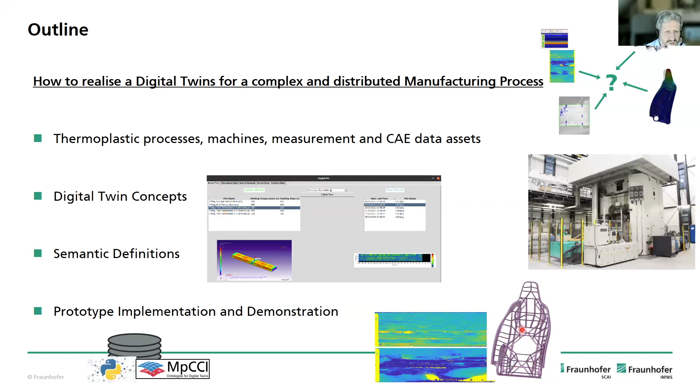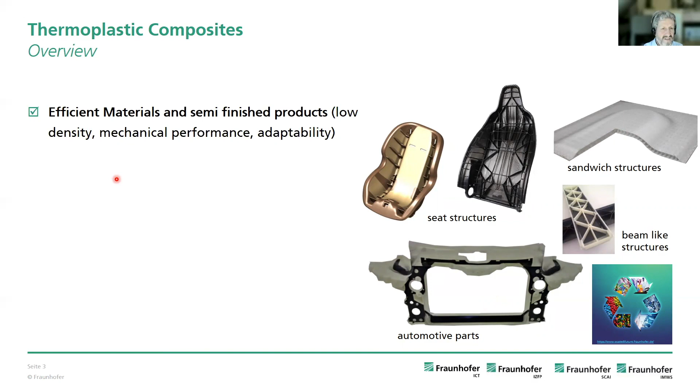So first, let's start with the thermoplastic composites. What are they used for? Application domains are mostly in the automotive area, for example, seat shells, but also chassis parts or shorter parts, beam-like structures. So anything that you can make out of these kind of sandwich structures. It's a quite efficient material, has a low density, but a high mechanical performance, and is highly adaptable to many different geometries and configurations.

We already have quite efficient manufacturing processes with short cycles and a high level of automation for serial production. And when you look at the seat shell here, we can produce quite complex part geometries by combining different types of manufacturing subsystems in one part. So, for example, doing a hybrid forming and injection process merged in a combined process. Also, the part manufacturing has a high level of integration, high functionalization in it, and also sustainability and recyclability is quite good in that domain. So that is just a short background on the thermoplastic composites.

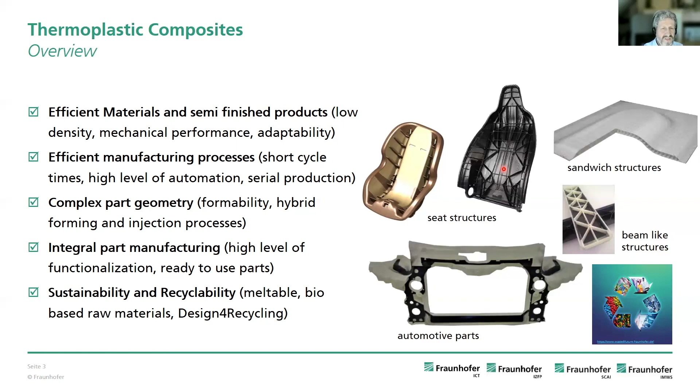What is the manufacturing workflow? If we, for example, let's go back, if you look at what we need to do if we want to produce such a seat shell for the automotive environment, what does the manufacturing workflow look like?

Starting point will be the fibers and the compounds coming from raw material providers. These compounds and fibers then will be used as input for the unidirectional tape line machine from Krauss-Maffei, for example, UD500. And the output will be, you can see it here, an endless fiber tape, which has a maximum width of 500 millimeters, might have a length of a few hundred meters, so that the final roll might have a diameter of 2 to 3 meters and a width of 50 centimeters. So it's quite a heavy thing.

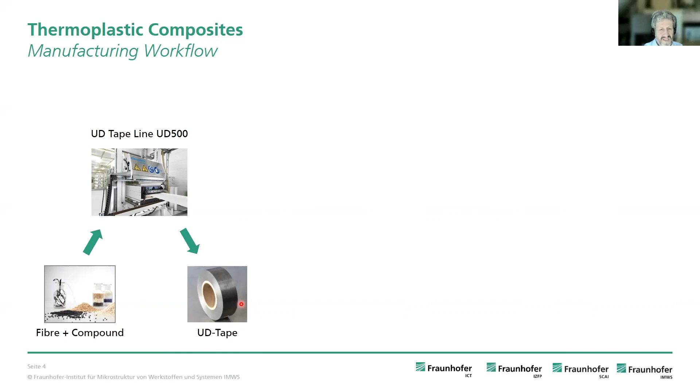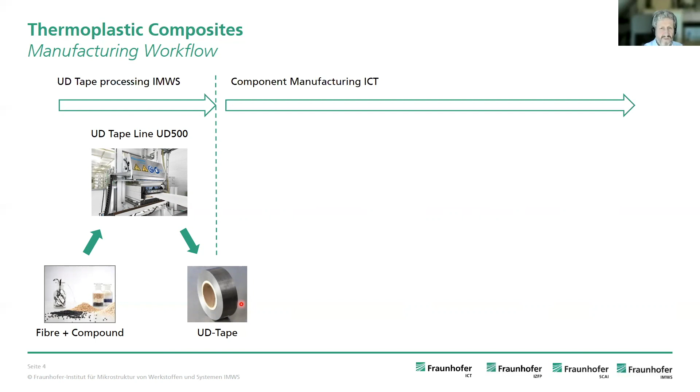This currently is done on this site in Halle, eastern part of Germany, at IMWS. They have those machines and all the knowledge to do it. And then these rolls will be sent to the ICT in Karlsruhe. They do the tape laying on these Dieffenbacher machines. The result of that stacking process will be a stacked layup, which you can see here, for example. This then will be consolidated in another machine, so that you then have the laminate.

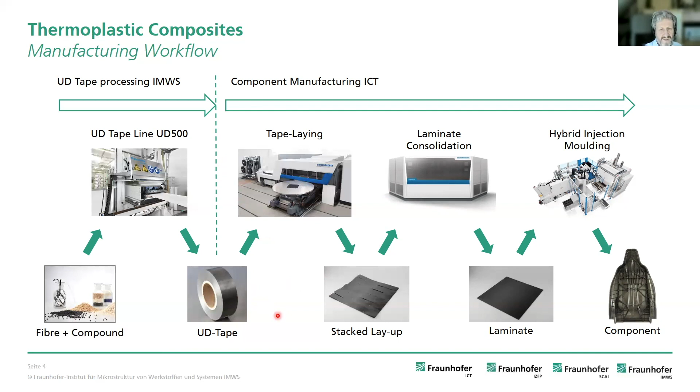The laminate then can be formed and hybrid injection molded to come into its final form of a seat shell, also having maybe metal parts included in that part. So those are the major parts of the manufacturing history. We have some steps left out here, for example, the slicing of those tapes, cutting maybe a few centimeters in the beginning and at the end. So some minor preparation parts would even happen here. They are not part of this digital twin, but we have to be aware of these manual parts outside the automation process.

What are the details which you want to look into? If you look into a tape and you make a cross section, this upper part would be a more or less ideal impregnated fiber with ideal fiber spreading, low gaps, low pores. It's very fine, can be used in high quality. If you look at the lower side, this would be a worse quality of tape. It might be used in some areas where we don't have critical loads on a part, but you need to know it, and this kind of information has to be extracted and measured by the sensor systems which we have implemented in the production machines for online inspection, but also for offline inspection.

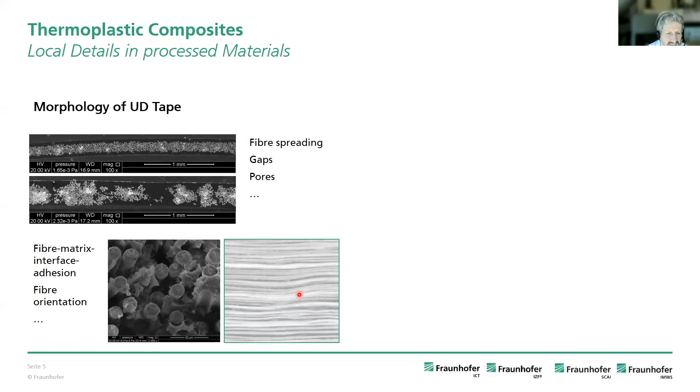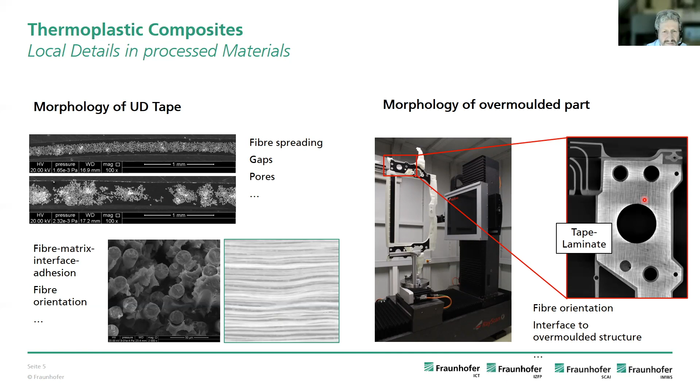So that is the level of detail that we have to look into, because those details have an influence on the final product quality. That means during the production steps, which I showed in the first slide, we have to implement and integrate many different types of measurement technologies, sensor technology, to get as much detailed data as possible out of the production process, and finally also for the final product testing.

That would mean, for example, on the tape production machine we have a camera system. It's kind of a stereo camera system, a profilometer to measure the thickness, but we also have infrared cameras on top and below the tape to do a thermal inspection, which also gives some first quality ideas of the produced tape. If that would be the produced part, that's not yet the final tape, so you see here the big gaps. In the final version you don't find these gaps, but they would have this camera here and the other camera here. They would provide these kinds of images during the ongoing production of the tape.

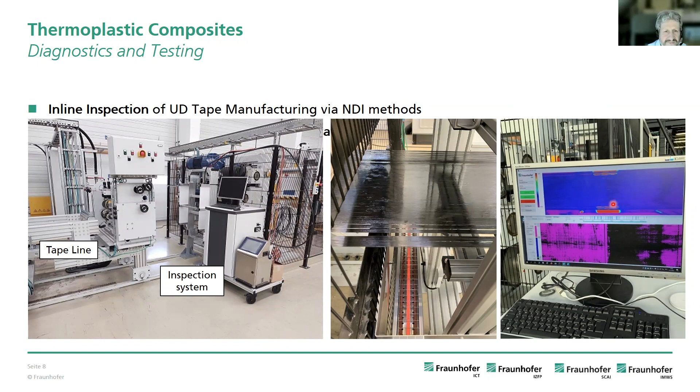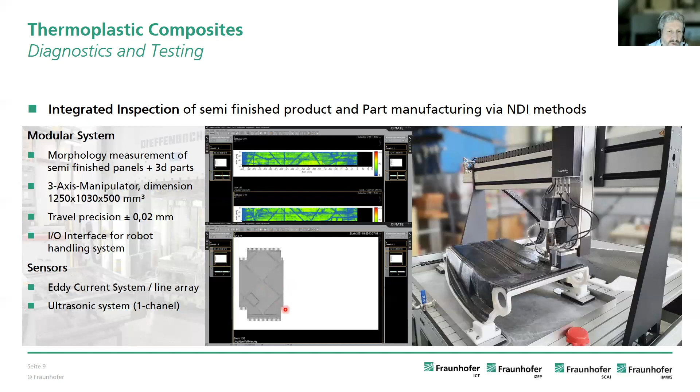If you look at the other end, on the seat shell, you might have morphology measurement systems, manipulators which can go slice-wise over the seat shell and give you feedback of the stack information of the final seat shell, which then can be compared to the stacking information used before the forming of that seat shell, that means in the laminate. That can be combined and compared to get a better feeling of how the input laminate will be formed into the final seat shell itself. You can see the real parts here, the real installations at ICT in Karlsruhe.

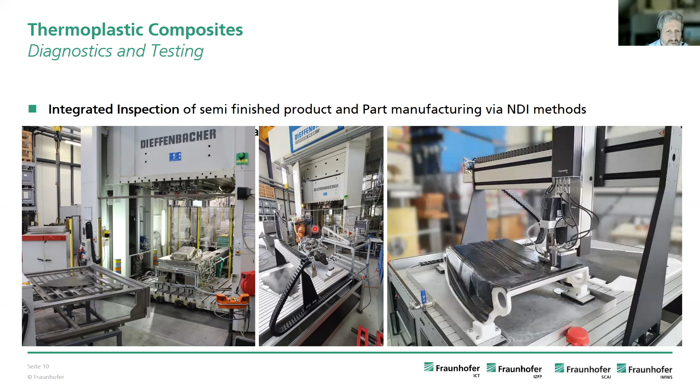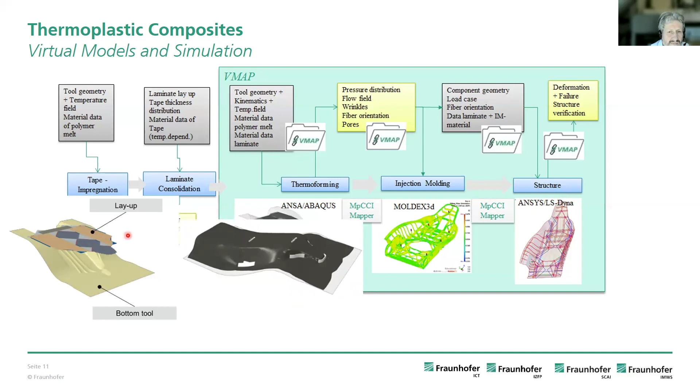And of course, we also do simulation, virtual simulations of the tape impregnation and laminate consolidation, thermoforming, injection molding, and structural processes. That means we have quite simple kinematic tools to do the simulation of the layup. We have more complex tools to do the injection molding part, hybrid mold, injection molding for the seat shell.

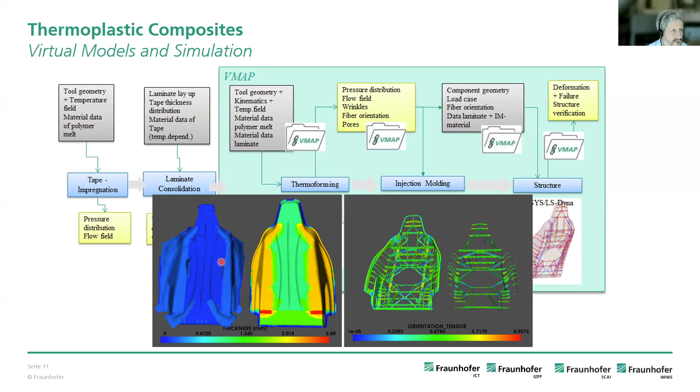And also we have tools to map data from one manufacturing process to the other one to make use of the preloads and the history of the materials in the follow-up simulation steps. So we already have a number of simulation steps implemented, but not all steps are simulated in that detail.

And that's also an ongoing work that is using AI technologies to do a smart analytics of the data. For example, if you have enough data of the tape production, and if you have quality labels on the tape, so that an experienced engineer says this part and this kind of fiber orientation is fine, and that part is not fine, is worse, then we can use AI and image processing tools to do more automated defect detection during

the online production of the systems, but also for the laying processes to get a better feeling if this kind of laying is favorable for the final product design, so that we, at the end, and that is partially still a future topic, get a parameterized simulation so that we can automate the simulation and the modeling by getting support from the AI-based analytics, which is based partially also on real data coming from measurements and sensor data.

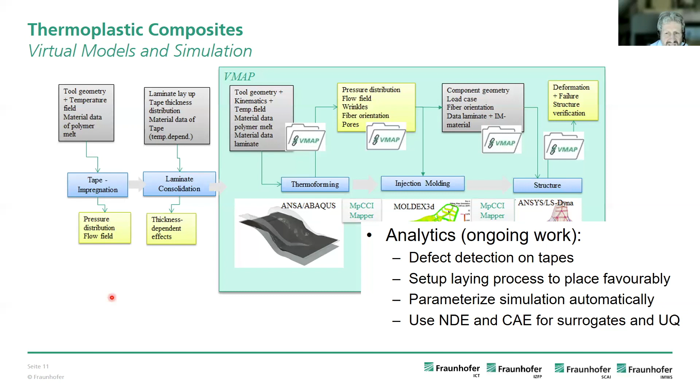So I showed you so far that we have many different sources for data, very different data also. So we have virtual simulations, mostly using FEM simulation models. We have diagnostic and online tools, online testing. We already had partially defect detection tools using AI tools. And we have access to many of the manufacturing parameters and manufacturing data itself and the organization of the manufacturing

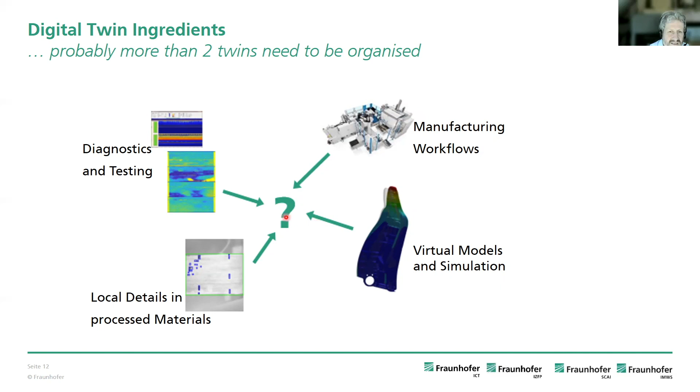workflow. And all these data sources need to be combined in a digital twin, or it might be a digital quadruple even, because we have more than two sources of data and information which we have to combine in a good way. That means we have to combine data from manufacturing, material, and simulation.

What does it mean and why do we use it in our application? So at the end, we do not only want to organize data. Of course, that is one benefit of its own, but we want to use this better organization of information and data of the complete processes and parts and products to optimize the processes and optimize the products, because we know better what is happening during the single steps. So that we can enhance the details, but also the overall development process.

And we want to get a multi-resolution and cross-scale, cross-stage information, not only on the highest level, but also, if possible, integrate microstructure information wherever possible and integrate that into the macro information world. And also try to get a better feeling of the interferences between the initial input of fibers and matrix. What kind of influence does this have on the final product of the seat shell?

And to organize all these data and information in a good way, we need an ontology-based data integration. That means we need clearly defined and well understood semantic definitions of all the data, information, formats, and so on. This should be open and extendable, so that it's not defined for one single case, but it

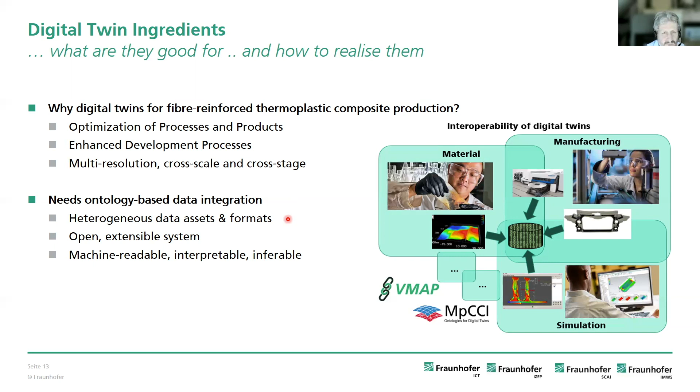And the industrial demand overall is they need to get a better understanding, and they want to get some idea how they can organize their distributed data systems, which they probably have, the legacy systems, data systems. How can this be done? And by using, as far as possible, standard interfaces, standard rules, standard concepts, which are currently used in industry.

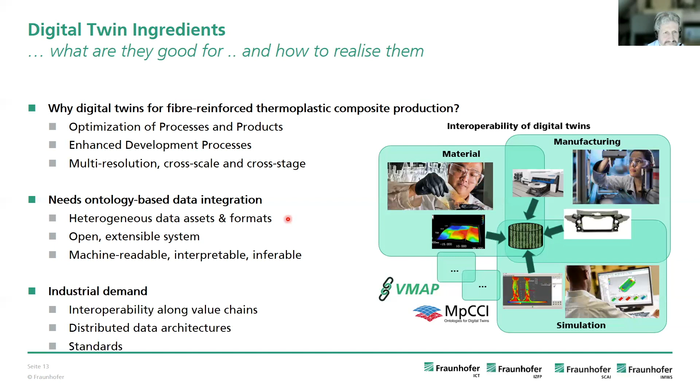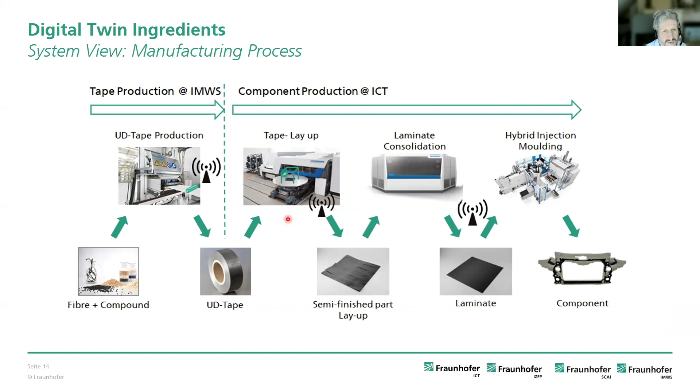So if you go back to the general manufacturing workflow, which I mentioned in one of the first slides, if you want to get a systematic view of the manufacturing process, we have to split the parts up into all their details which are of some interest for us. That means, as you can see in this animated part, finally we will have a list of details represented by those icons here, which represent the most important parts in that manufacturing process.

Starting from the input here from the fibers and matrix. In the beginning, we have here the tape production part. We have here the stack laying part. We have here the overmolding part, and here we have the final seat shell.

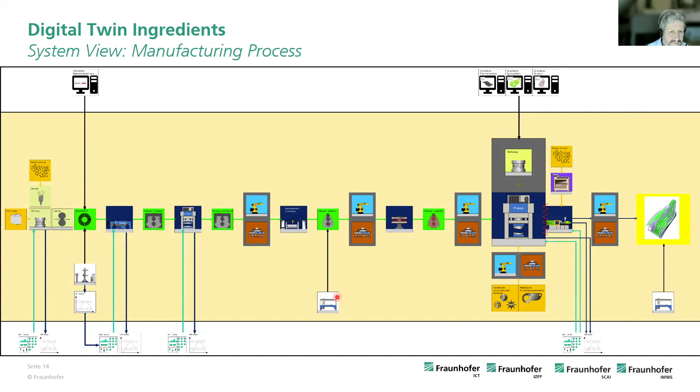That means we have machine data. We extract machine data, all the parameters which are of some importance or might be of some importance for the data inspection from the different machines: for the tape machines, for the stack laying machines, for the compounding machines, and for the hybrid injection molding machines at the end. So we collect all these data, list of parameters over time.

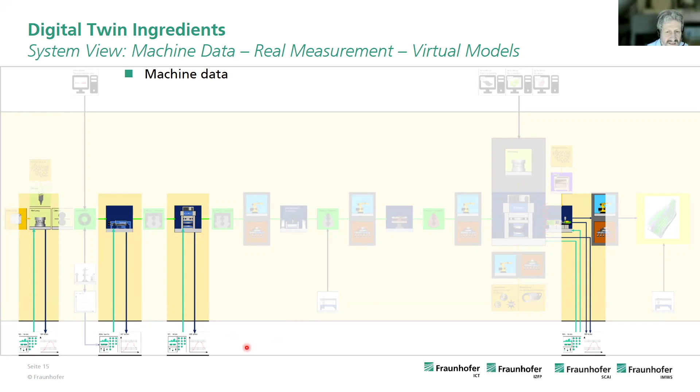We collect also data from the non-destructive and online evaluation in the machines. So we have three places at the moment where we can do an online inspection. We have online monitoring sensors installed in the tape production, in the overmolding part, and in the final product inspection part. These data might bring us results from ultrasound inspection, thermography, and other inspection tools.

We have a number of simulation tools. Here in our case, currently only for the two major steps, for the tape production and for the hybrid injection molding process, where we have multiple simulation steps connected. You see here, this part is not yet simulated because we don't expect yet too many unexpected issues, problems, and so on in that domain. We could do this later on and extend the simulation world also for some of these steps in between. The concept of the digital twin is open for that, but it's just a question of efforts which have to be put into the update and creation of simulation models.

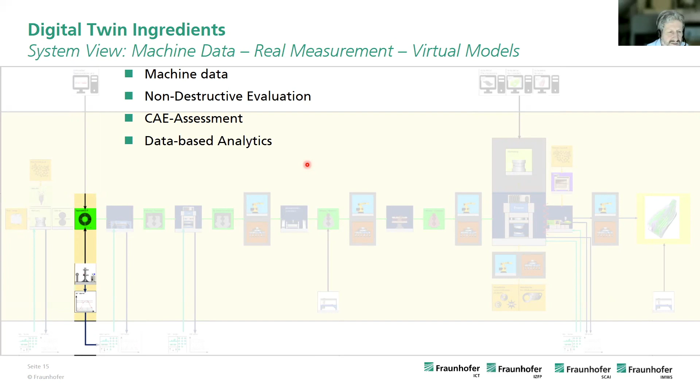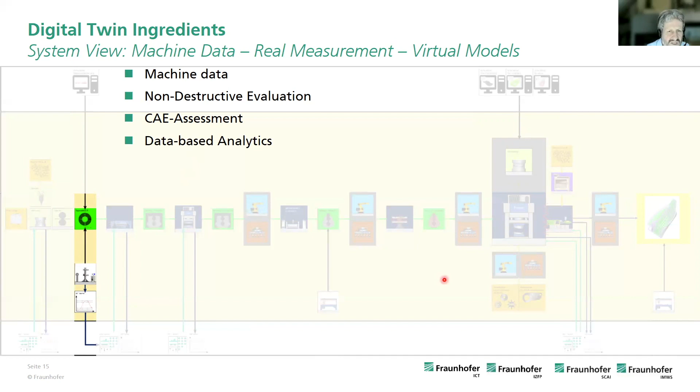And we use a first approach to use data-based analytics or AI-based analytics for the inspection, automated and AI-based defect detection of the tapes coming out of the tape production machines. But again, these types of data-based analytics could also be used in different steps here. But for the moment and for the prototype, we do it just in the first step here.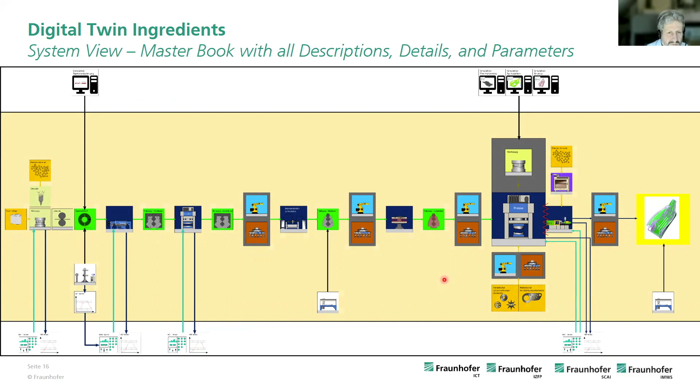So if you look at this quite complex general overview of the workflow, we also need the traditional manuals, reference books, which describe all the details of all the single steps, processes, machines, simulations. So a kind of handbook or reference book, which will be updated all the time. If you change some part here, we probably have to change and update one chapter which is describing that specific detail, and then we can regenerate a new reference book for the current installation.

So also the reference books or the master book has to be flexible, so that it's easy enough to follow the replacement of single parts in the real world, so that the master book can also be generated in a fast and efficient way just by replacing single parts in that master book.

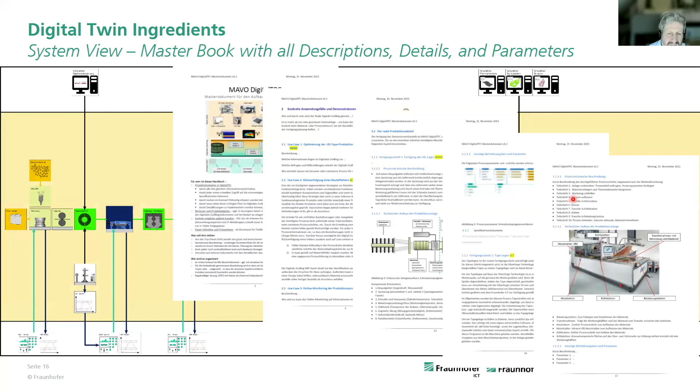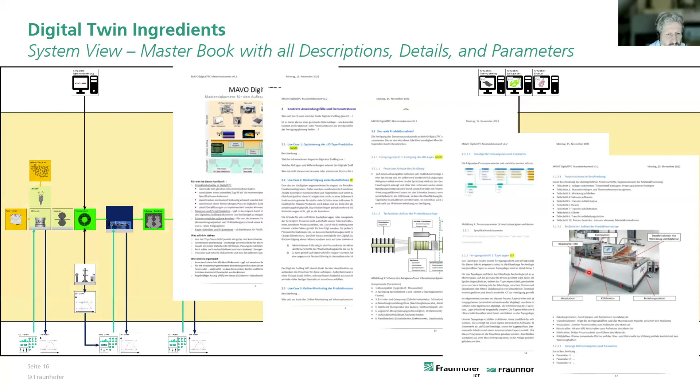So this is really a handbook for the end user and for the technical engineers to understand in all details what the parameters are about, what is the parameter range for each data, what does it mean, how is the machine built up in detail, where are the real positions of sensors in the machine, and so on and so on. So this is also still necessary in a classical way. You have to write it down and collect all information in a readable way.

So far I spoke about the ingredients, what kind of information is available and will be used and combined in a digital twin for these processes. But that is a major question, and is getting even more complex if you look that we have engineers from material science, which are experts in the fibers and matrix parts. We have experts for the different manufacturing processes. We have experts for the non-destructive testing systems. We have IT experts. We have AI experts. And all these different experts, in the beginning at least, speak a kind of different language.

Just imagine if you speak about temperature, what exactly does temperature mean? It sounds like a simple word. But before you store a temperature value somewhere, you have to know what is meant by this temperature. Is it a temperature of a complete space? Is it temperature just on a single point? Is it temperature of a room? How did I measure the temperature? Is it radiation temperature? And so on. So even for simple temperature, you have to describe in detail how this value is defined from a syntactical point of view and also from a semantic point of view.

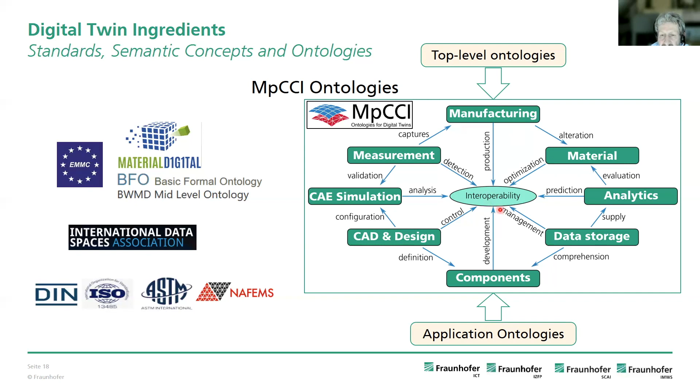And based on these many definitions, we define the basic taxonomy for materials in our MpCCI ontology, so that the major definitions, and especially the class names used here, follow these well-established and widely used naming conventions in many of these DIN norms. So that should be quite readable at that higher level. And also the subclasses are quite well described already here.

You will find similar things for manufacturing entities. What is a manufacturing entity? It might be a manufacturing process and manufacturing systems. For the manufacturing processes, you could see coatings, shapings, formings, separating processes, and so on, and detail this further. All this is already described in a very good way and accepted by many DIN norms and European guidelines, and so on. So we use this information as input for our definitions, for our taxonomies.

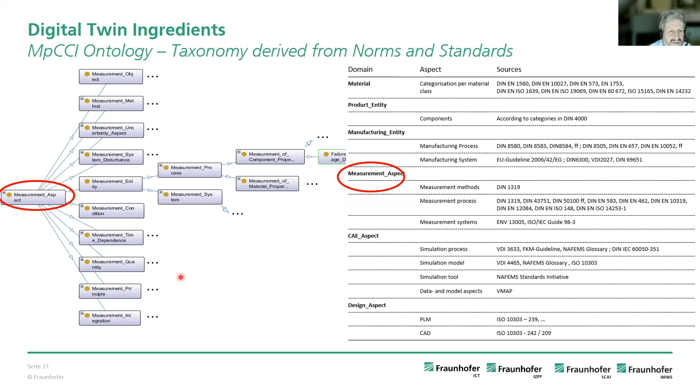Same for the measurement. Again, you see many different norms which we use for the higher level organization of the taxonomy. In the simulation world, you will not find so many DIN norms, but more VDI or NAFEMS norms, which also give quite good, at least practical, guidelines on how to organize and differentiate different simulation processes, simulation tools, simulation models, and so on, so that this is most widely understood by simulation engineers in that world.

Now, VDI and NAFEMS are independent organizations representing thousands of engineers in that domain. Therefore we follow their definitions and their ideas to organize information. So that was the higher level taxonomy, the basic classes for information. Each of these classes, quite similar to object-oriented programming, C++, Java, and so on, has data properties.

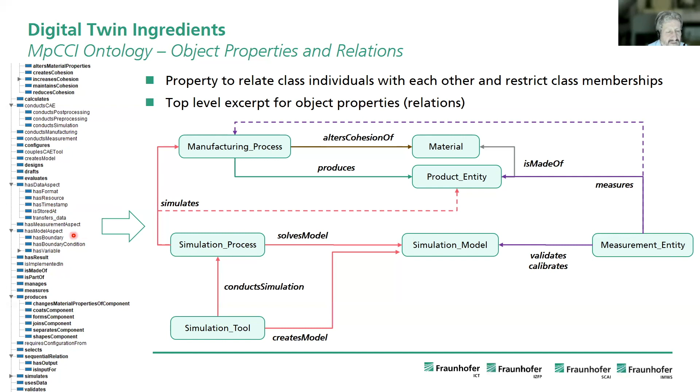For all these relations, we have predefined a number of generic relations between the generic types of classes we have here. Any of these properties can be refined further if you have a very specific application, but that would just be a single-place refinement—all the higher-level rules would still be applicable.

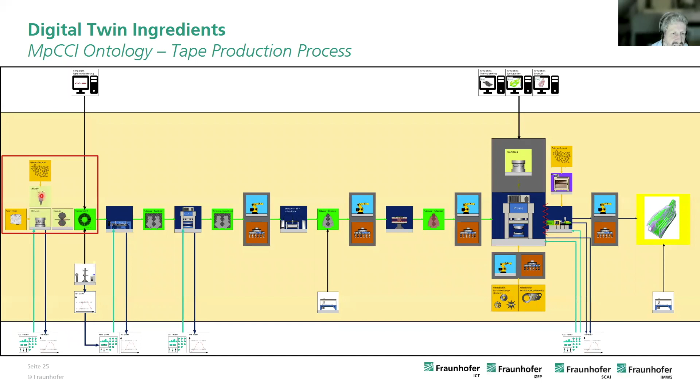So what does this mean in concrete detail for our process? Going back to the systematic view of the digital twin, looking at the tape production part: we have the fibers, the matrix, the machine—the calender, including its components, the extruder, and so on—and finally we get the product out of it.

That means we have the input: injection granulate and roving fiber as the class, the type definitions. For a concrete manufacturing process—say, for a specific tape produced on March 24, 2021—we could even add the date and time. We want to know in detail which granulate, which package of granulate, was used for the tape produced at that time.

So we have instances for the granulates, instances for the roving fibers coming from specific companies, and so on, so that later, when you have the tape itself, you have the tape production and the identifier of the final tape—the thermoplastic UD tape made on that day, run through a production system using the roving fibers via the tape production parameters, where you'd find the manufacturing parameters of the machines and process information.

So all the information from a class, a generic definition, can be broken down when you have a real production—real instances for each part—so you know exactly what ingredients, processes, and parameters were used to produce that tape.

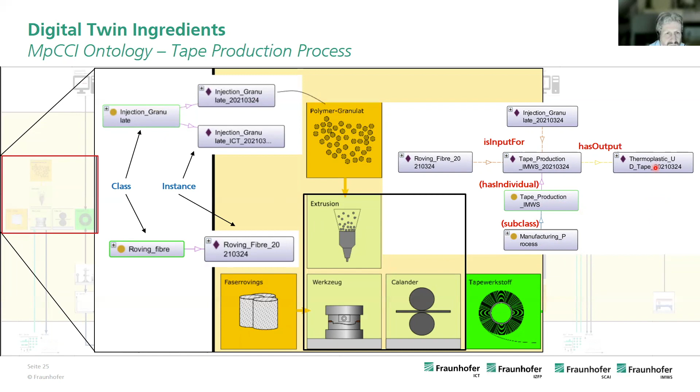Similarly for the overmolding part, which includes the metal parts: for overmolding, you have to look at the tape production part, the tape laying part, the laminate consolidation, preparation, heat treatments, and also the metallic insertion part. So the overmolding has feedback—backward links—to all the single steps already completed before.

So for a single overmolded part of seat shell, you will find all the single steps which have been done before and all the information for these steps. And similarly for the simulation, a simulation instance will have a concrete date and time, so that it can be linked, using the meta information, for comparison to real data. And also for the measurement, this has to be linked directly to a concrete product or pre-product, so that you have the date and time usually for these inspection data.

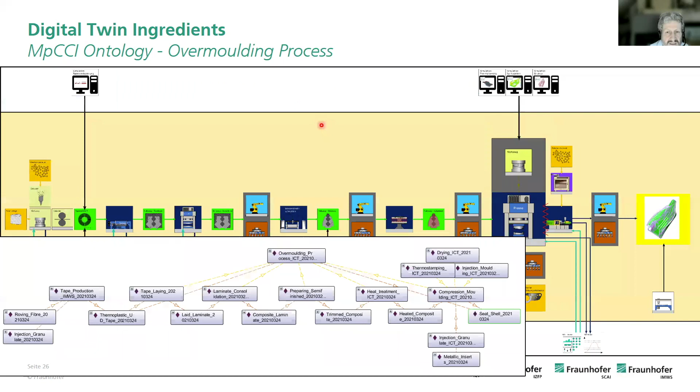So that would be the final way how to use the ontology to create real instances of data, using the ontology concepts, the object properties, to link between the single data properties of a measurement data to a simulation data to a manufacturing machine parameter data set.

So that was all about the way how to organize data from a more semantic or principle level point of view. For the end user, for the OEM for example, we have the different machines: the tape production machine, the stacking machine, taping machine, the consolidation machines, and the hybrid injection molding machines installed on at least two different sites. And the end user, which might be a machine driver, a design engineer, or materials engineer, wants to extract as many details as possible on all steps.

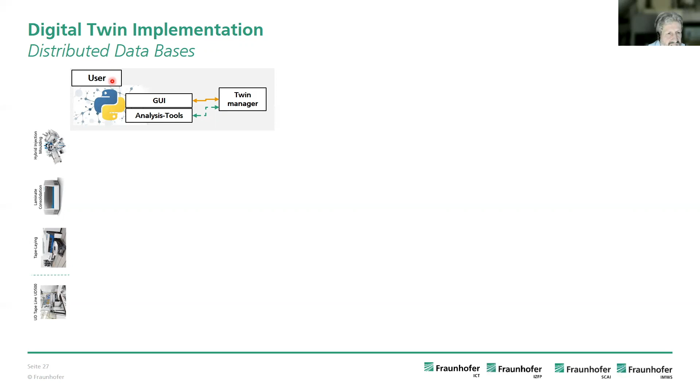So we at SCAI, our task was to find ways to combine the different data. Each of these partners have their own data services and data systems inside their company world, and they have put some data servers in front, outside the firewalls, so the user and partner can select which data will be provided for the digital twin analysis, so it's under their control which data will be put on the external visible server.

So we have DICONDE type servers. They manage all the inspection data, the ultrasound and thermography inspection data. We have different types of SQL-based servers. We also have our own cloud system for simulation data, for example. And all those types of servers have different interface types: DICOM, REST APIs, Database Connect, REST APIs for Django, and WebDAV services for OwnCloud, and so on. There will be many more different typical ways of connecting databases to an integrated system.

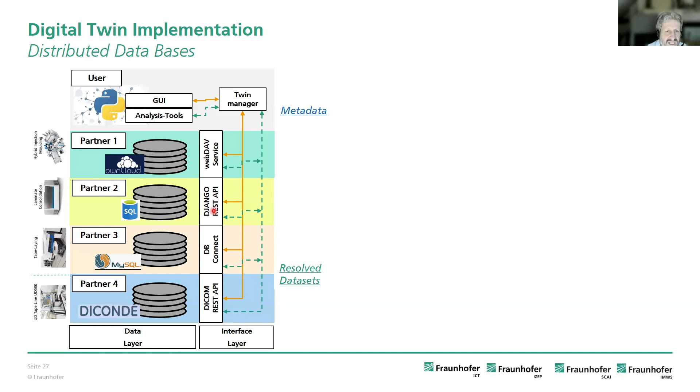So the first way was to define the software interface layer so that we can connect and read and write data from the distributed located databases. And then we have to define the metadata which needs to be extracted initially, at least, to know where I can find which information just by looking through the meta information. So for example, I'm looking for all the tape data which were made on that date and time on that machine. This kind of metadata must be made available and fast accessible to these interfaces to the Twin Manager.

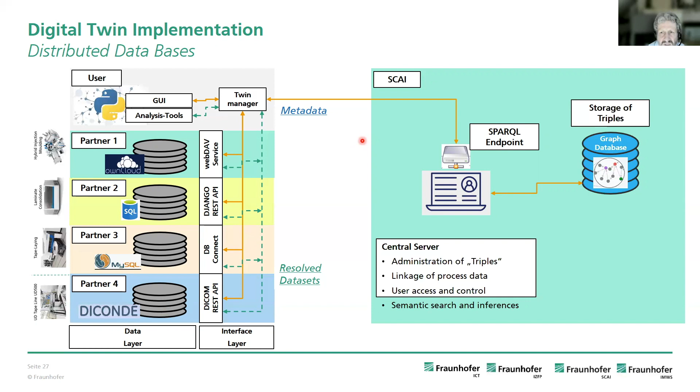And this graph database then can be used - that's a standard technology also used by Google and all those companies - to browse the information and look for further relations between data. That means, for example, if I want to look

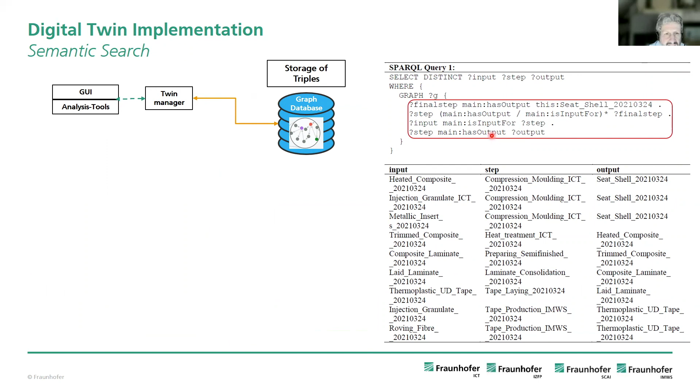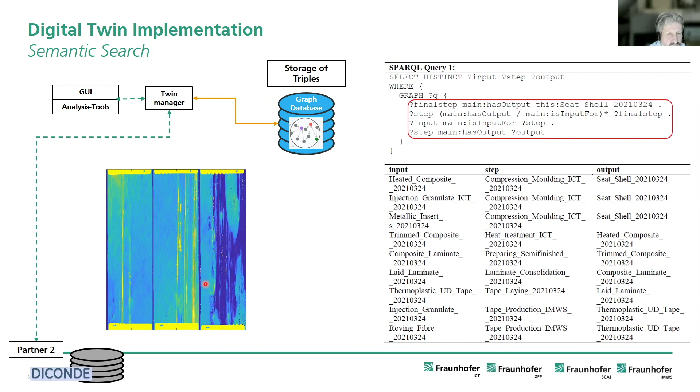for the seat shell produced on March 24th, 21, and I want to see what input was used and what output was used for all the steps before that for that seat shell. So first I can try to access the machines and read out the machine data. Then I would get access to machine data over time, and I can check, involve, and analyze this in some way. I can also extract the initial and raw ultrasound or thermography images and try to work on this and use it for further analysis. And I can also extract high-level simulation for the seat shell itself, which was made at some time. So that is the first idea of the digital twin, to get access to all data related to a specific entity, a specific seat shell, which was produced at a single step.

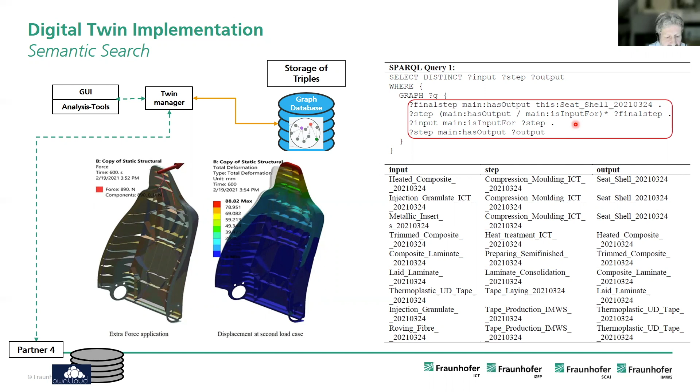I could also ask, for example, I have a big tape. This big tape can be used and has enough material for many, many seat shells. So which seat shells overall have been made from this big roll of UD tapes at some time, if I need to know this.

And we are now on the way to make this a bit more comfortable. We have a draft user interface on an ASCII level, but we are also working now on the graphical user interface for the system, so that you can put your request to the system and get feedback directly in the related presentation modes, for example, for simulation of the seat shell at some point. But that is just the user front end. The data management is the same behind.

So that is the step where we are currently in. So what is it good for? It's fine to have all data organized, which may help in the future to find a better organization, but what is the concrete benefit for the end user, for the OEM, for the manufacturer, by using these digital twins?

One point might be a feedback loop: if you do many tests of the final seat shell and find some weak points, you can look in detail at which material was used, which processes were used in the different steps, which process parameters were used, and then analyze what might be the specific reason for this weak point, supported by different types of AI analytics tools. Then you can go back, because you know the detailed parameters which led to the final seat shell, and improve some parameters in the tape production or change some parameters in the tape laying processes.

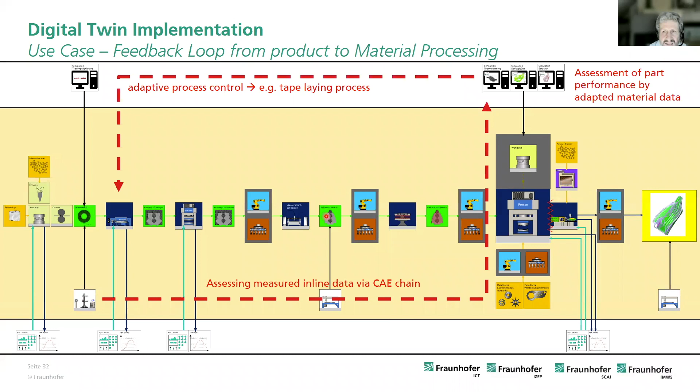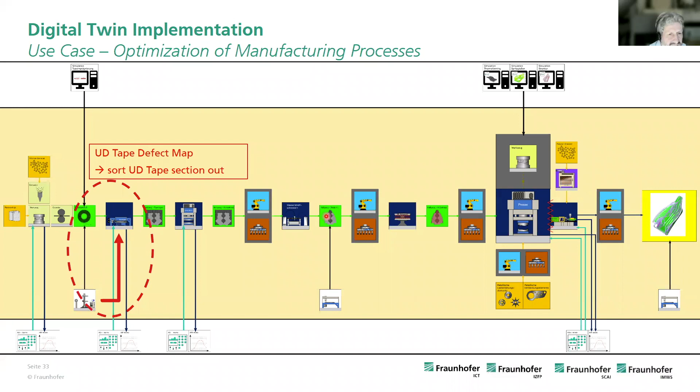Another part might be more local optimization, having ongoing online monitoring of the tape production, so that during production of a single tape, the monitoring system and sensors can see some kind of defects. They can directly control the machine, the ongoing process, and correct the parameters, so that only a few meters of UD tape have a defect, and the rest is fine. That would be more a local improvement from using the digital twin. But anything between these local and global uses for optimization would be a result of a good digital twin catching all relevant data in that specific process.

Okay, so let's come to my last slide. The implementation of digital twins for thermoplastic composites needs a lot of work, a lot of ingredients, a lot of expertise. At first, of course, you need interdisciplinary teams and expertise—people who can and want to talk to each other, because you want to combine technical information from quite different domains in one big data system. You have to understand each other very well. That means working on a common language, which in IT means developing a good ontology system which captures all definitions and data in a good and systematic way.

And of course, that is more on the engineering side itself. If you know what you do with the data, it's really helpful to implement and integrate more non-destructive sensors during the production line, so that you have early feedback during production if something is going wrong, and later also if something happens with the final product, so you know why this happens.

And of course, now it's better—it's more feasible how to use and validate CAE simulation results, and how to use simulation results in the different steps of that digital twin, if you exactly know what a simulation is done for, which part and which step will be solved by a simulation model. And this also needs flexible data management concepts and interfaces.

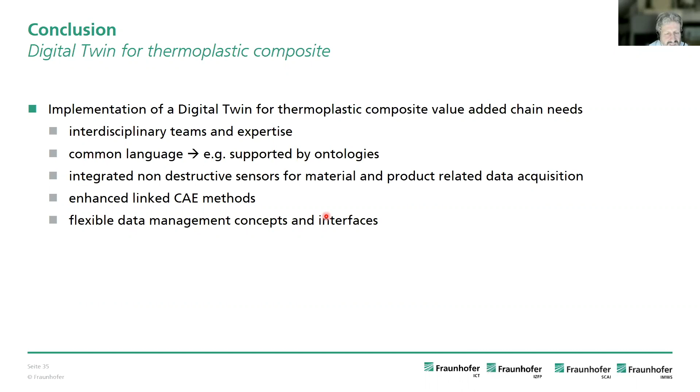Yeah, what I showed here is just a pilot scale technology lab, which we have an open tech day in springtime in May next year, where we show all these aspects in, hopefully, an online running digital twin. We can all see the data during the online production.

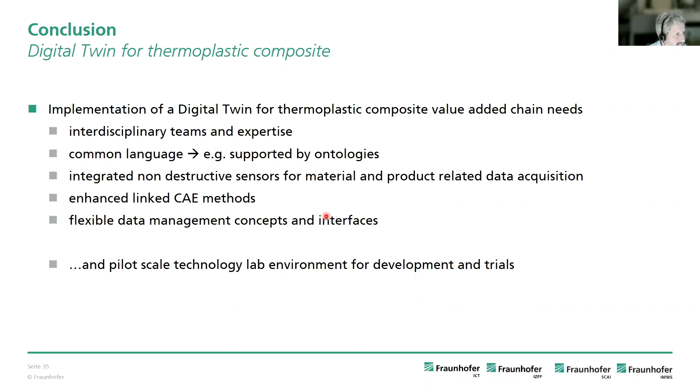Just a hint. This tech day was planned for the 1st of February next year, but as you might know, Corona stopped these activities. So it will be postponed to sometime in May. But then we will have a tech day at the Fraunhofer Institute in Schkopau, in the eastern part of Germany, where you can see all those details: the digital twin, the real machines, the real materials, in real hardware and real software running.

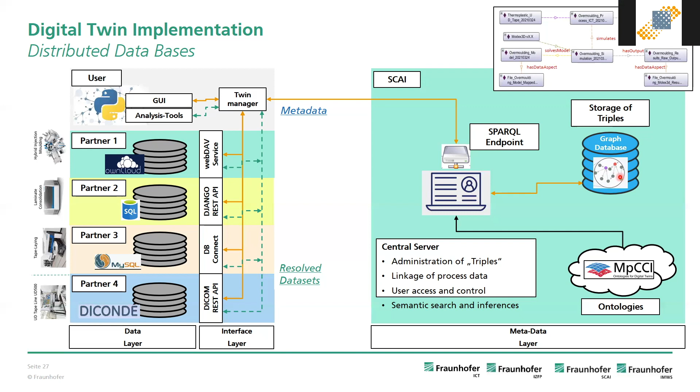Okay, I have another question in the chat from Dr. Schulz, and he asks, is your digital twin activity linked to higher AR, VR systems like Holodeck from Fraunhofer Gesellschaft IIS? And there's also a link in the chat. That would depend. That depends a bit on the type of data which we want to visualize.

If you would have many of these 3D or big data, then it might be useful, instead of using these standard visualizer tools, to bring these data into an AR or VR system, virtual reality system, or maybe if you have AR glasses, to connect this AR front end to the digital twin. That means AR, VR, or a simple visualizer are just different types of user front ends which can make use of those data in the digital twin.

So they are just different ways of representing data. They don't process the data. And so there might be many good uses for AR, VR systems, yes. But we haven't done this yet. Okay. That's very interesting because, yes, you presented this screenshot, but I think this is not so interesting for you as a computer scientist because for you it's more important to have the process behind this.

Because I think this question was quite nice. If, for example, you have a seat shell which has mistakes in the structure, and you can have these lenses, and you can take a look at the seat shell, and you can zoom and also pick up some areas, and maybe you can get the ultrasonic pictures. So this would be quite futuristic, but as you said, it's just the front end, and the main music is in the back end.